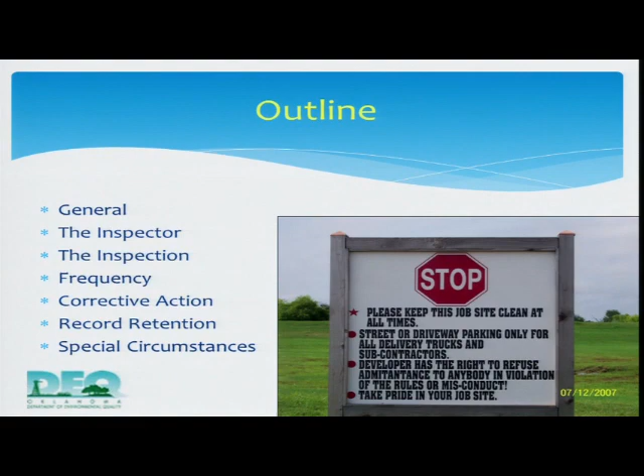All right, so this afternoon, after the heavy lunch, I hope you don't fall asleep, we're going to talk about site inspections and record keeping. All right, so what I'm going to talk about this afternoon is first just some general things. I'm going to talk about who should be doing the inspections, the inspection itself, frequency, corrective action, which we touched on in a couple of presentations, record retention, and then any special circumstances that you run into.

All right, so in general, why are we even doing this? What's the point, right? What do we care? Well, we care because we need water to survive. And if you want to look at it in a practical sense, turbid water, which is what happens to water when sediment gets into it, is harder to treat for drinking water.

When you go out to do inspections, your most important thing to realize is that you need to be safe. So that includes wearing your proper protective equipment, if you need a hard hat or steel-toed boots. Watch what's going on above your head. Watch the speed limits. Bob Gigger, up in the back, actually got to see somebody, sadly, get clipped by a car. So it's really important.

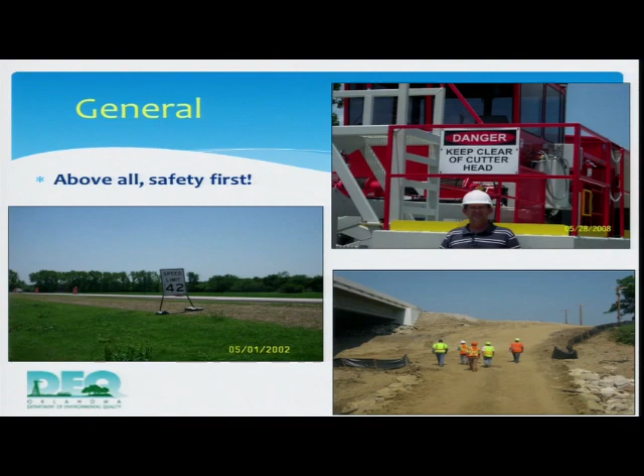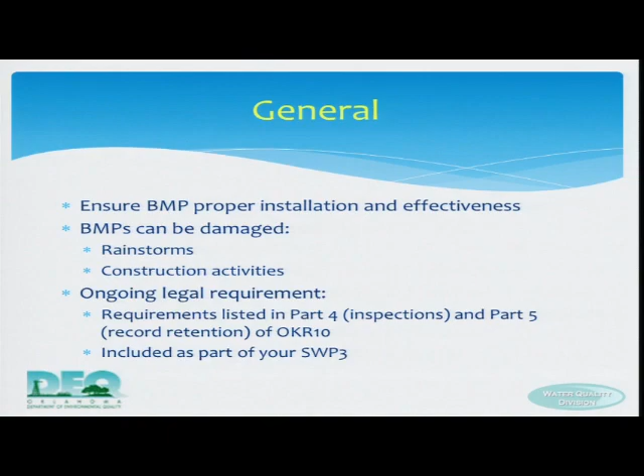Okay. So why do we do site inspections? Well, you want to make sure that your BMPs are properly installed and they're effective. You know that BMPs can be damaged by actual rainstorms or other types of weather events, snowstorms. They can also be damaged by construction activities. You know, Joe was talking about enjoying riding on the bulldozer, and we've all seen bulldozer work in riparian areas. Well, that same guy who's having a good time, if he doesn't know you're there, he can run you over. But he can also run over your BMPs. Also, and probably more important to you, it's a legal requirement in your permit.

Your SWP3 requires several pieces of information about inspections, maintenance, and corrective actions. You need to identify your inspector. You need to have your inspection schedule listed in your SWP3. You need to keep track of all your checklists or forms that you're going to be using in your inspections in your SWP3. And you need to list your specific procedures that you're going to do to take corrective action.

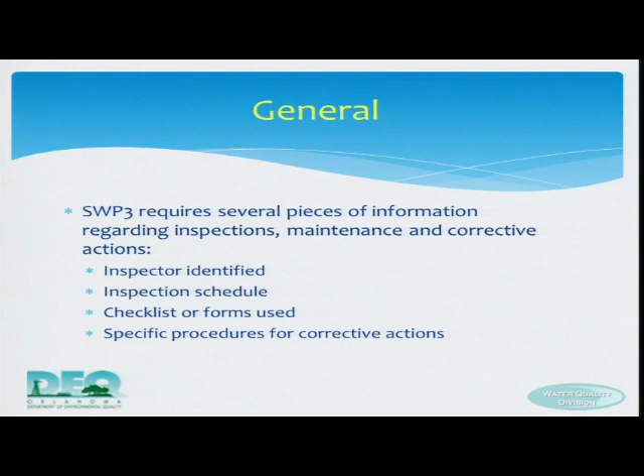So the inspector. This is an old DEQ guy, Robert Jemison. Some of you may know him. Your inspector needs to be somebody who's qualified. Now, your qualified inspector can come from your actual crew. Maybe it's you. Maybe you're the only guy. You can contract it out to somebody else who does it on a contractual basis. Whatever you use or whoever you use, they need to be qualified.

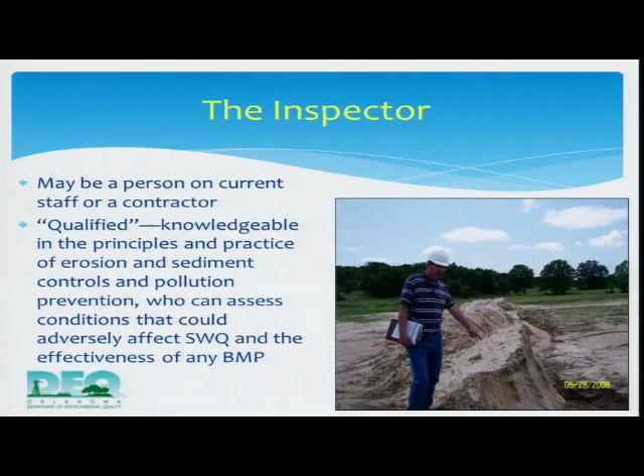And qualified, well, that implies training. So you need to make sure that whoever is performing your site inspections understands general BMP ideas and sediment and erosion control. You need to know that they know your specific site stuff, your SWP3, and it needs to be somebody who can figure out if something's not working or if it needs maintenance, and then can figure out how to fix it, all right?

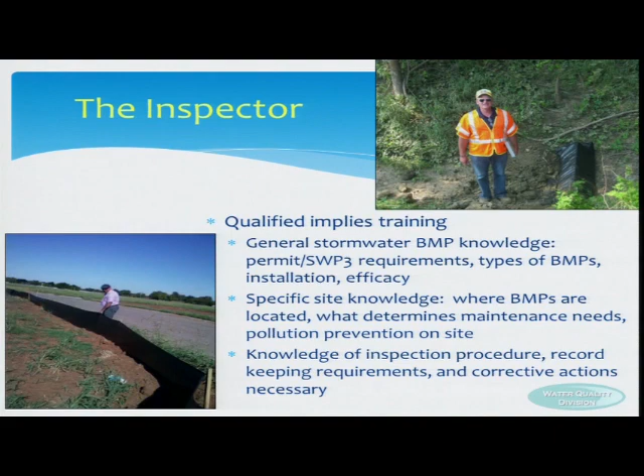At the minimum, for the inspection itself, you need to make sure that you're looking at all the cleared areas, all graded areas, excavated areas, with or without stabilization, because you are going to need to look at your stabilized areas, not on the same frequency as your unstabilized areas. You need to make sure that you're checking all of your controls, including pollution prevention. So those areas where you have stockpiled stuff, where you have fueling, where you have storage of materials, make sure you're looking at that too, and storage of maintenance areas.

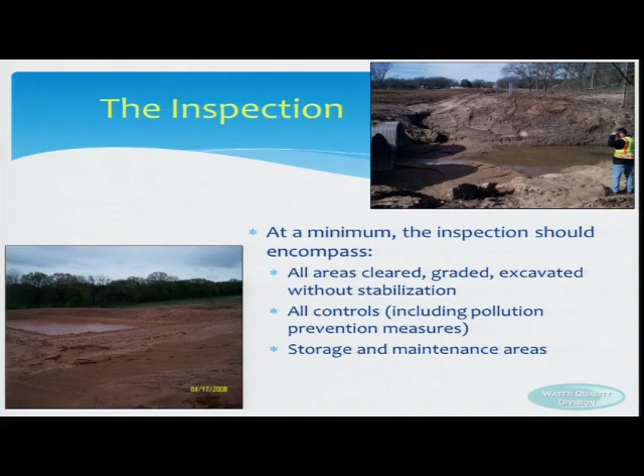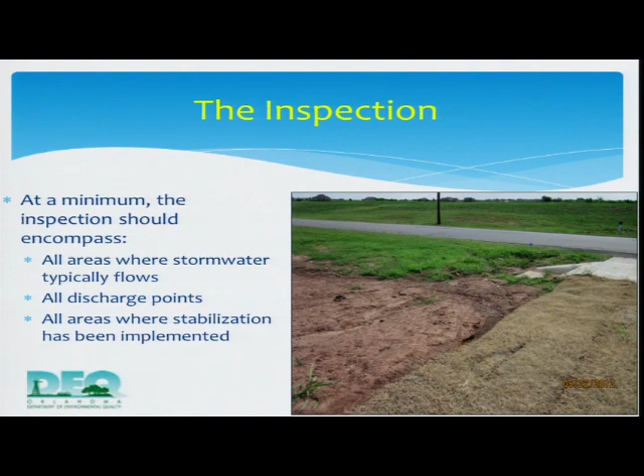All right, at a minimum, you need to look at where stormwater is going to flow on your site. It's really handy, I find, if you take your site map with you around and look at where the water's flowing, so you don't miss any areas. You want to check all discharge points. And if there's a discharge, then you're going to have some extra requirements, including visual monitoring. You need to check that where you need stabilization, it's been implemented and it's growing and working.

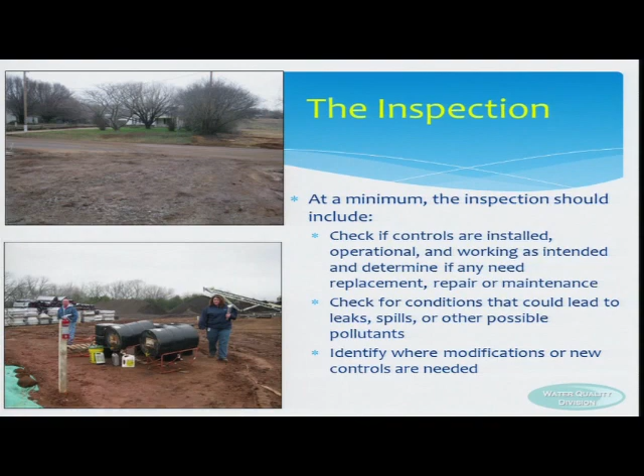Right here, we have a storage area, fueling. If you can tell right here, this is leaking. There's no berm area or anything. It's just running off. So check all these areas. At all of your discharge points, you need to check to make sure that you don't have any sediment or erosion occurring.

You need to make sure that at the banks of the creek, you're not having erosion or sedimentation occurring in your surface waters. Once it gets in the creek, and Joe loves to say this, once it gets in the creek, it's gone. So it's better to stop it before it gets there.

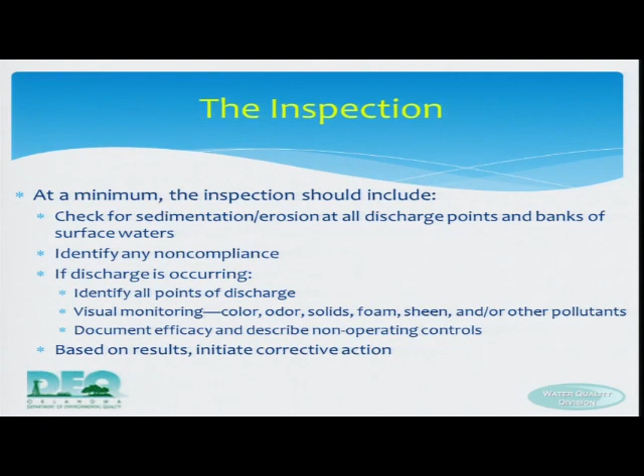You need to check on your sheet. They'll say, do you need any maintenance? Is there any non-compliance? You need to make sure that you've written that down, that you show that, yes, there's non-compliance. If the discharge is occurring, identify all points where the discharge is occurring. Visual monitoring needs to occur, and these are all visual things: color, odor, solids, foam, sheen, that kind of thing. And there's actually a form that you can use to fill that out. And then, whatever you find, that's when you do your corrective action.

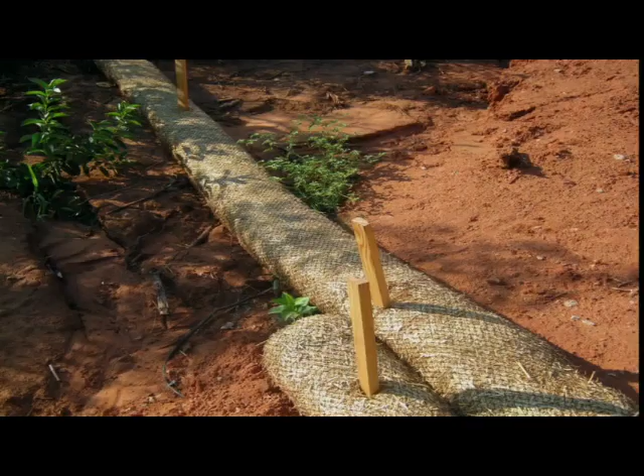This is straw wattle. Straw wattle is actually pretty effective. It needs to be trenched in though, and it needs to be maintained. As you can see right here, it's been undermined, and now water and sediment is coming right underneath it.

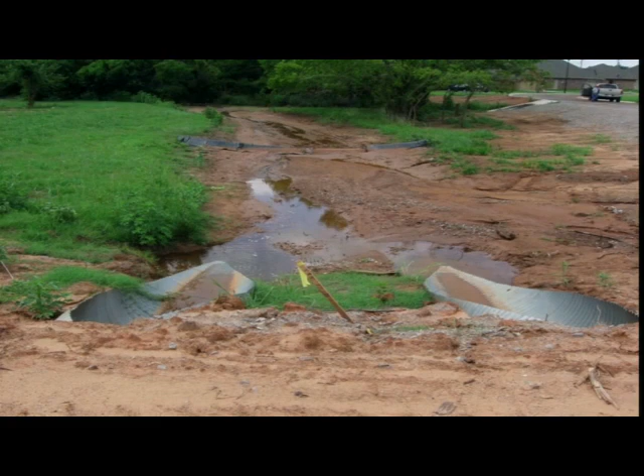This right here, back in the back, I don't know if you can make it out, there's a creek area, and here is some triangular silt dike, which is also a wonderful BMP. It did its job for a little while, but there wasn't enough. And so now all that sediment is headed down into that creek back there.

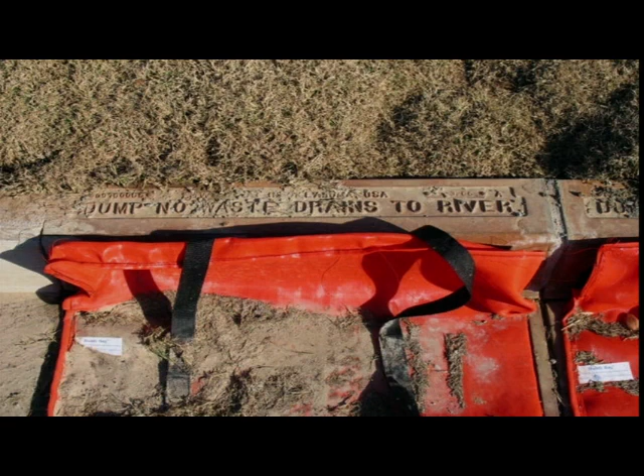Inlets, be sure you check your inlets. This is a good way to keep it from getting into your storm system. As you can see, dump no waste, it drains to the river. Here's one that's got a little sediment in the actual drain.

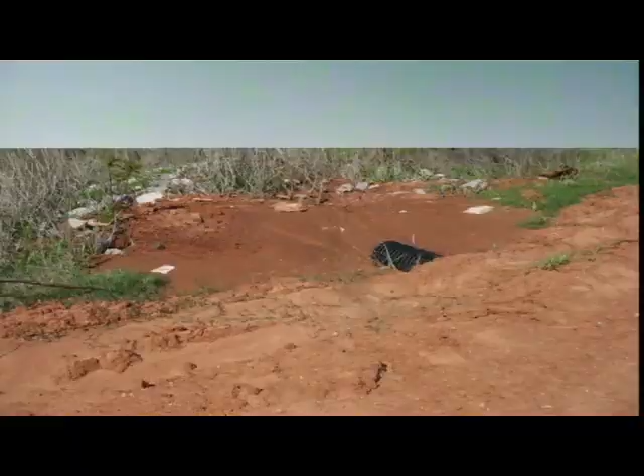Check all of your rock check dams. Joe was talking about how sometimes you see velocity dissipators being covered in sediment, and here's an example right here. They're gonna have to go in and clean that up and put that back. They could have put in some controls here to make sure that it didn't go down the side and erode into the check dam, and maybe they could have placed the outlet somewhere higher up like it's required to now.

You want to make sure that your silt fence, because everybody pretty much uses silt fence, is put in according to specifications. You want to make sure it's trenched in and compacted. When I come, when Joe goes, when Bob comes, when Carrie, any of us come out to a site, we're going to check to make sure it's trenched in. And even if it looks like it is, if I can get my fingers under it, that's a pretty good indication that it wasn't installed correctly.

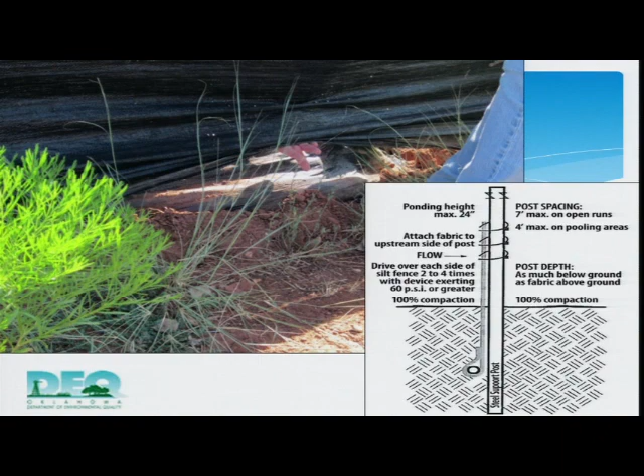Joe was talking about how silt fence can be an effective control, and it can catch quite a bit. But when it gets to 50% capacity, you have to pull it back out. So if you walked by your site and you saw this, if you were doing your inspection, then this would require maintenance. You would need some kind of corrective action.

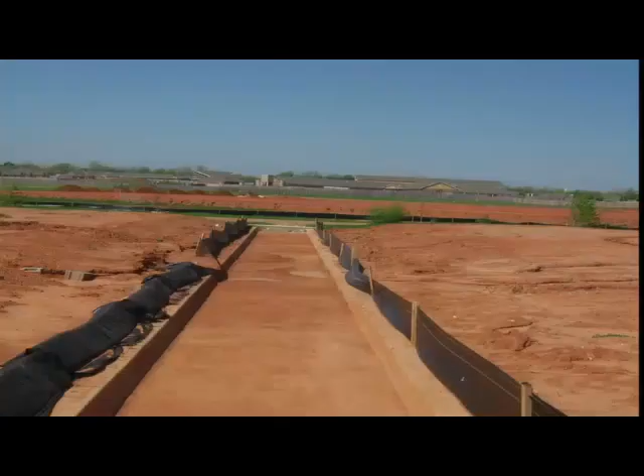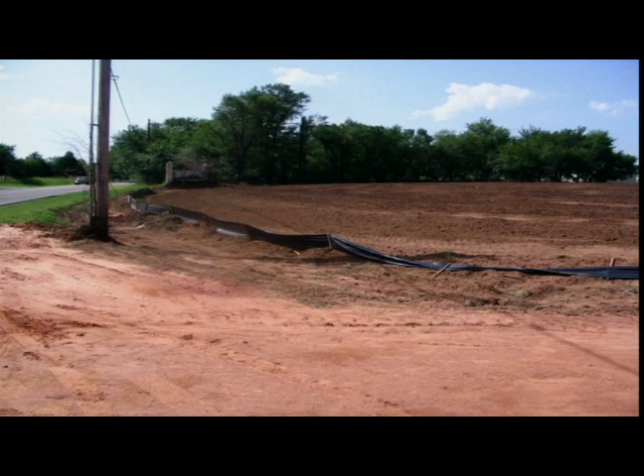Here, again, silt fence. It probably worked for a while, and then it got overcome. And this is going straight down into another velocity dissipation area here and into that creek. So this would be a great place to really focus some of your effort to make sure that sediment's not getting down into that creek. Is it installed correctly? I've said this before, but if it's laying over, then that's a good indication that it's not.

Choosing the correct placement of silt fence. As you can tell right here, this is a pretty good placement of the silt fence. The water's coming, it's hitting where it should, and there's a pretty good little buffer there. Here, maybe not so much.

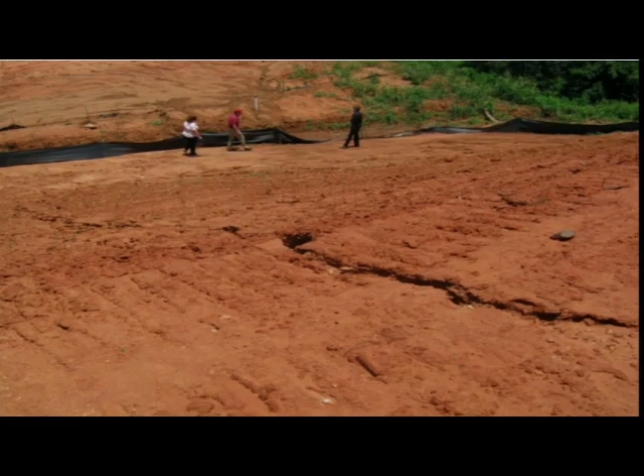Here's another application. If you're on a huge slope, is silt fence an effective BMP at the bottom of a huge slope? Anyone? No. It's not going to catch all of this sediment coming down. And you can see there's pretty good rilling right now, right here, coming down the hill. And it's already been overcome.

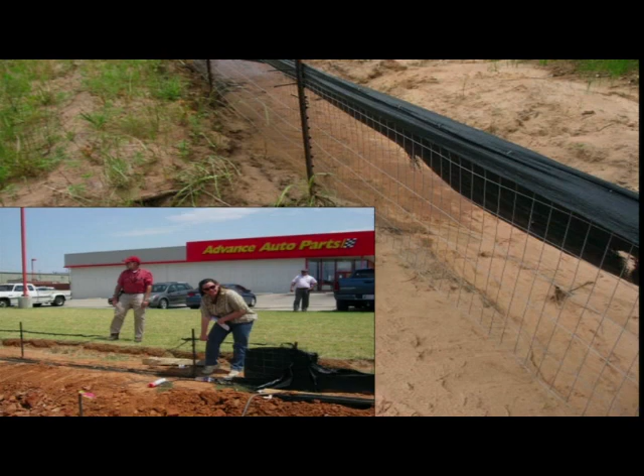Joe said that if it's installed, it needs to be maintained. If you're not going to use it, if you want to have it removed, if you mark it removed on your SWP3, it needs to be taken out. This is wire backing, and here I am. I can pull on it. It's in there pretty good, but there's no fabric to actually stop the sediment.

Now, granted, in this particular situation, on the bottom, they put the silt fence uphill, so it wasn't going to do any good anyway. So there's a lot to be said for walking your site with your SWP3, if you've had an engineer or somebody else do it, and making sure that it fits the site conditions and the size and the slope and the topography.

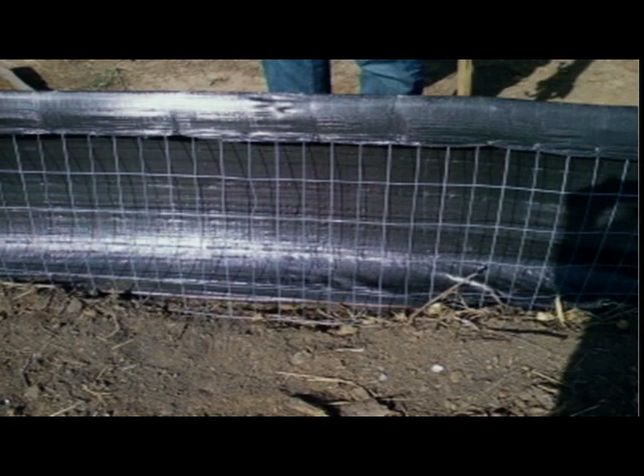Now this looks not bad, right? It's got the backing and it looks like it's been trenched in, right? A little bit closer, and there's Joe's toe, because it wasn't actually trenched in.

Okay, so we talked about looking at the other control areas, and this includes concrete washouts. This is a big thing that we see a lot on construction sites. Usually the concrete guys just want to wash out right where they're doing their work and stick it right there on the side of the ground. So what's the big harm? You know, it's just concrete wash water.

What does it matter? Concrete wash water has a pH of about 12, and so that can actually harm fish if it gets in the water. If it gets in the soil, it can make whatever contaminants are in the soil worse because of the higher pH. So that's something to realize. This one is actually built correctly. It's full, and somebody didn't actually wash out in it. But there's a sign that says where it is, and it needs some maintenance.

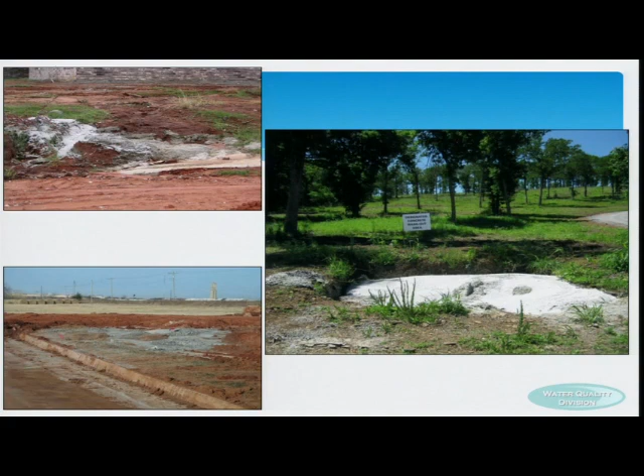So look at your SWP3 and follow whatever pollution prevention measures are in there. You're going to have something in there, whether it's cleaning up the soil or making sure that your drums are removed or berming the area or pulling them out as they're done. So just make sure you're following it.

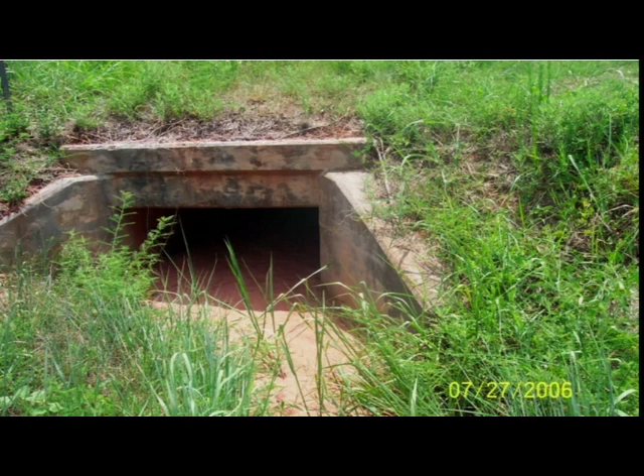Here's another area where sediment has left the site. Now, this isn't in a creek, so this might be a place where you could go and remove the sediment before your neighbor got mad and sued you. Walking downstream. If you think that maybe sediment's leaving your site, go on ahead and walk downstream and take a look, because here you can see sediment in this culvert right here.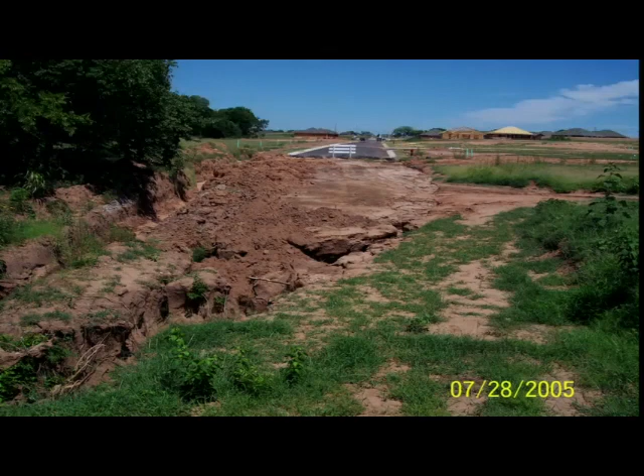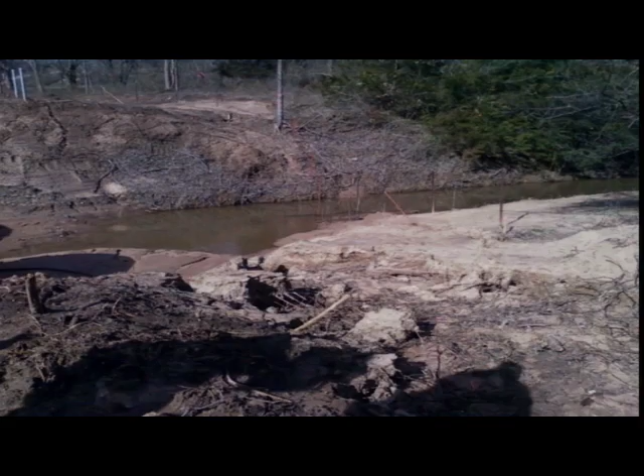And the entire area of the site. It's really easy to stop where the asphalt is and the major construction's going on, but if you come a little bit past, you can see that there's quite a bit of erosion right here. It's huge. And that erosion has gone straight to this creek. And that is just mud everywhere. Check all the banks of your surface waters. As you can tell, it's already hit the creek here, and there's more erosion here.

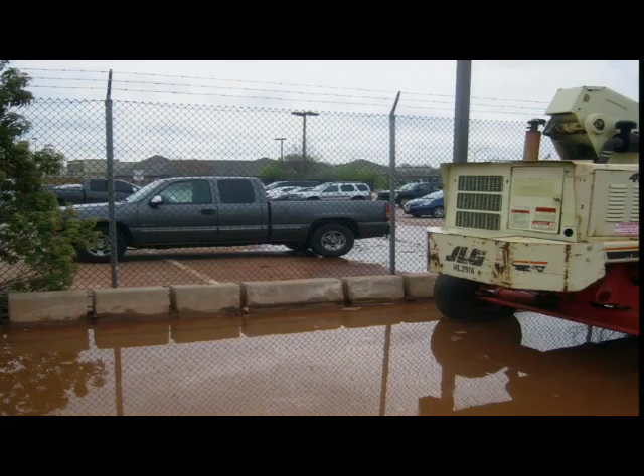All discharge points. So this is a site in the metro area where they didn't have any kind of controls along here because it was concrete. They didn't think they needed anything. But when you come over here and look, where the rainwater has gathered, it's discharging onto the post office's parking lot right here. So that's going to be a discharge you're going to need to look at and make sure you're not getting sediment or other pollutants, because what was actually in this water was oil. This particular machine right here was leaking into this water, and it was going right off site.

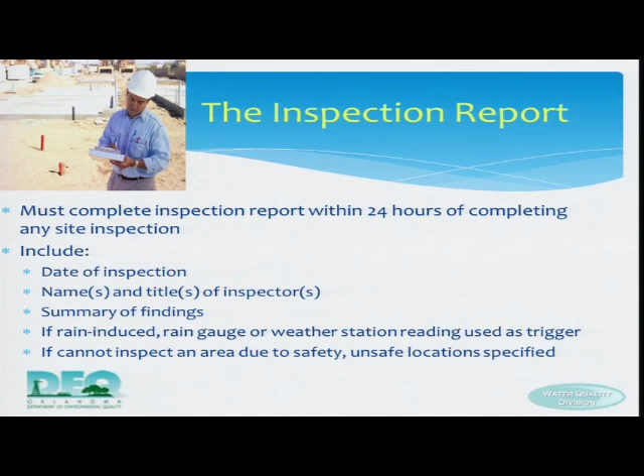All right, so you've done your site check, you've done your site inspection. Now you need to fill out your inspection report. Your inspection report needs to be completed within 24 hours of doing the site inspection. You have to have the date, the name and title, the summary of the findings. You have to have what you used to determine if it was a weather-determined event. So if you go out because it's a ½ inch of rain, did you use a rain gauge? What was the reading? Did you use a weather station? And what was the reading? And if you can't go to an area because it's dangerous, like Joe said, then you need to document that too.

Every inspection, just like every piece of paper that you keep in your SWP3, has to be signed by the duly authorized representative. Again, you're certifying that you're not making stuff up, so make sure that's in there. In your SWP3, you want to keep copies of all your inspections so that when we come out, you can pull them out and we can look at them and make sure you're doing them correctly. Or make sure you're not signing a bunch of blank copies and just appending them to the back.

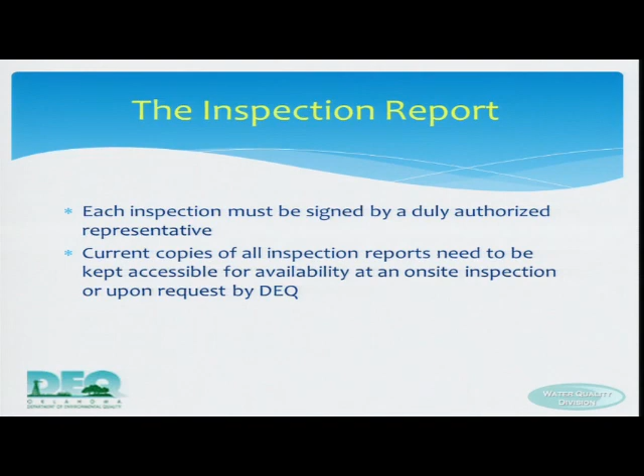This right here, this is an example of just a site checklist. This is at the military housing privatized portion of Fort Sill down in Lawton. They contract with a guy who comes out and does just a little site check, and then he goes back and fills out an inspection form, and they work together to clean it up.

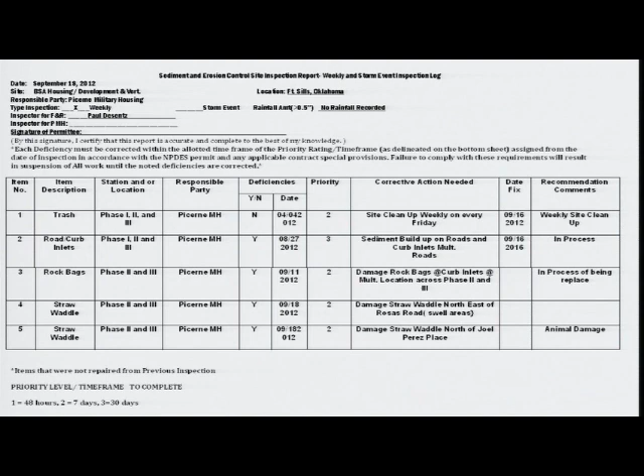So the frequency. How often do you have to inspect? Well, at a minimum, according to the permit, you have to inspect once every 14 days and within 24 hours of a ½ inch of rainfall, and if you have a discharge from snowmelt. A lot of people don't think about that particular thing because it only comes during the winter. But if we do have snowmelt and it's caused a discharge, then you do need to inspect within 24 hours.

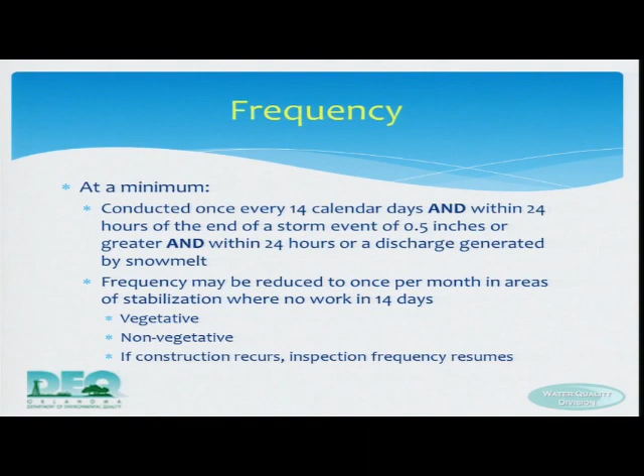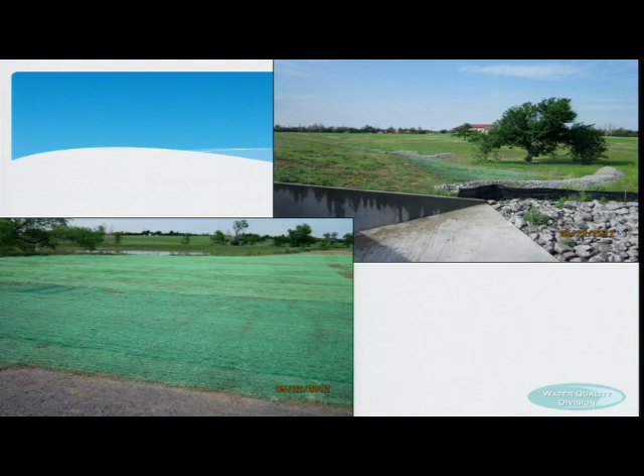And these are examples of stabilization, no construction's going on for at least 14 days. This is also at the privatized military housing at Fort Sill.

All right, so you've done your inspection, you found out that your construction entrance needs refreshment, or you found out that your contractor didn't put in your silt fence correctly, or you found out that nothing's been put up. When that happens, then you need to do a corrective action, and it's required within 7 days of finding this out. And this also includes the special cases of the asphalt batch plants. So if there's a monitoring exceedance, there has to be a corrective action.

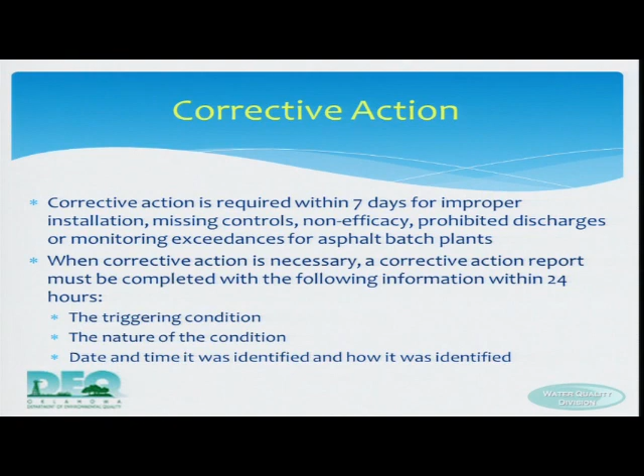When the corrective action is necessary, then you also have to create a corrective action report, and that has to be created within 24 hours. You have to put on this report the triggering condition, the nature of the condition, and the date and time it was identified, as well as how it was identified.

If you can't do your corrective action within 7 days, there is some leeway, that's fine, but you do have to come up with another date, and then you have to describe why you can't meet that 7 days. You know, we can't get gravel shipped in within 7 days, whatever it is. And again, certification statements. Everything that goes in the SWIP, everything that goes with the permit has to be signed and certified by a duly authorized representative.

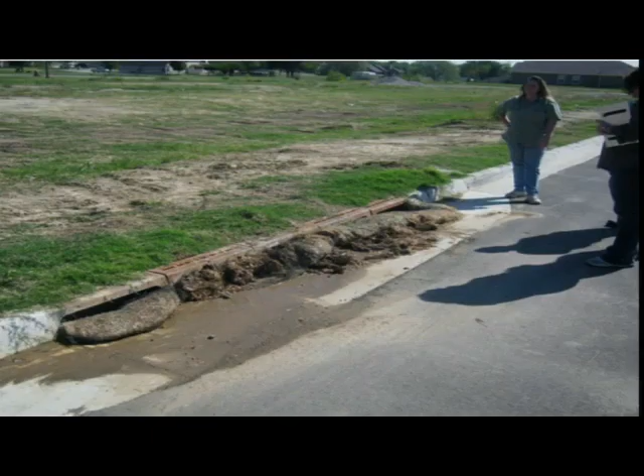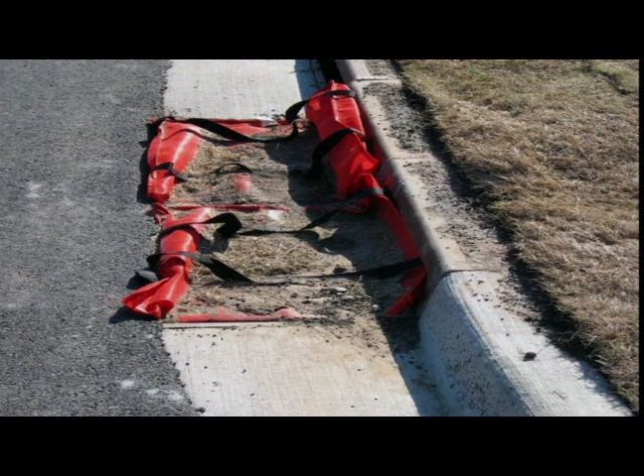Don't forget to look at all your inlets. This one's pretty easy to correct because you can just lift it up and clean it off. The other one, you have to pull out all that hay and reinstall. Now in this case, maybe what you need to do, since you're getting it in the street, and that's quite a bit of sediment there, maybe what you need to institute is a different kind of street cleaning program. Maybe you're doing it as needed. Maybe you need to start changing it and doing it once a week. Or maybe you need to get people with shovels out there every so often to make sure that this is not occurring.

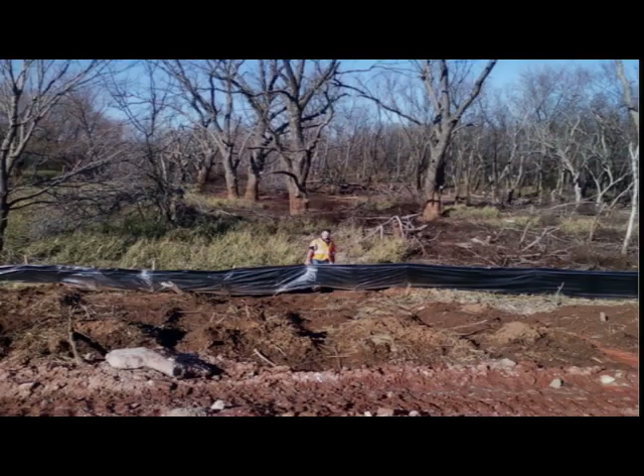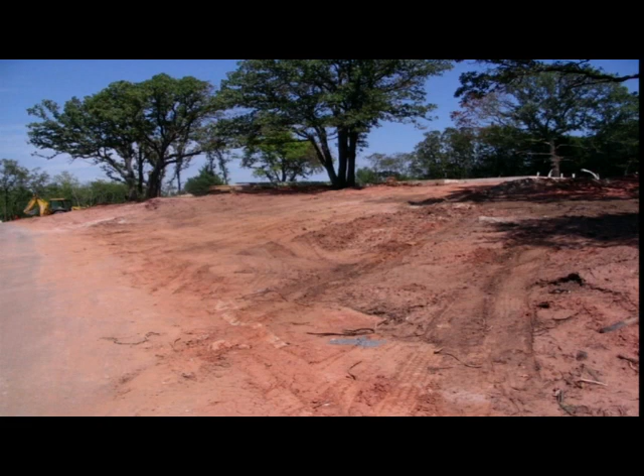You find that your silt fence isn't installed correctly. Well, A, you probably paid that contractor to install that silt fence. So I would call him up and say, hey, why didn't you install this correctly? Come fix it right now. Don't forget to document it in your corrective action report. This is another instance where you need corrective action because nothing's been installed. This is the road and this is the graded area. It's kind of hard to change.

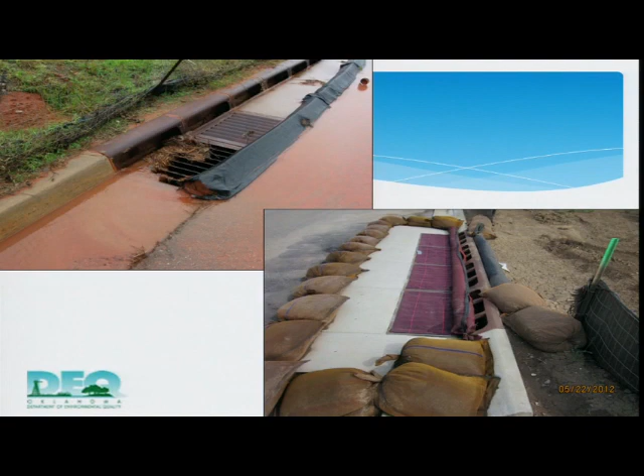Within 7 days of the trigger event, a record of the following has to be completed. Any follow-up actions that you've taken when you're reviewing the design, the installation, or maintenance controls, and you've got to keep all the dates with it. The summary of any modifications that you're making or that will be made, with the dates that they either have been made or will be made. And then finally, a notice of whether you have to update your SWIP, okay? When you're updating your SWIP, don't forget your site map. It's really important.

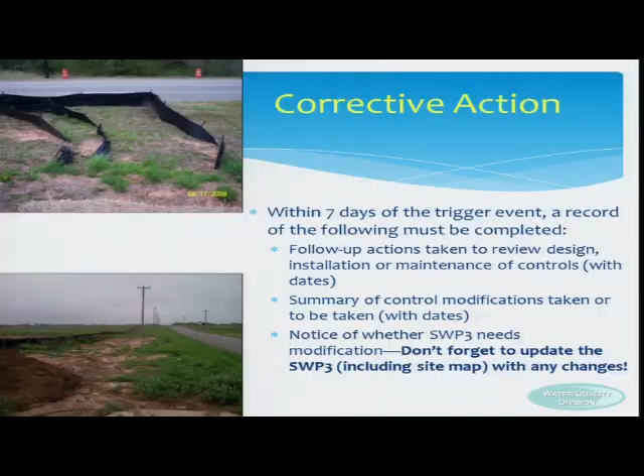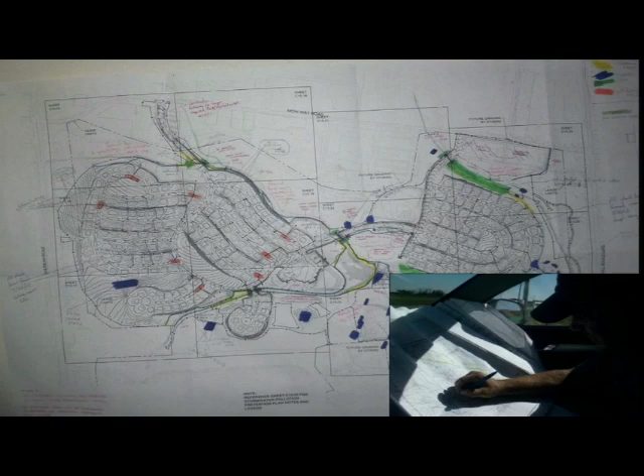These are two examples of site maps. This is from Concern, color-coded, dated, initialed. Now, they keep this on a wall. They have one that they use to walk around and make notes on, and this is on the wall so that they can keep track of everything all together. And this is in Elgin. He's filling out his site map right at the site, and that's fine too.

Record retention. You have to keep all of your records from the start date of construction to the date that you have final stabilization. And then you need to keep all of those records somewhere in your corporate office for 3 years, according to EPA. You need to keep a copy of the SWP3 at the construction site or at a place that's locally accessible. So locally accessible, like Joe was saying, means within a reasonable amount of time, you can get it to the site. As you know, you have to keep an actual sign at your site that has all of the information.

Well, on this sign, not just that, you have to put where the SWP3 is located, okay, and how we can get a hold of it, how we can see it. If you want, some people do this. They leave a little box out there at the site, if you're not going to be there all the time, with the SWP3 in it.

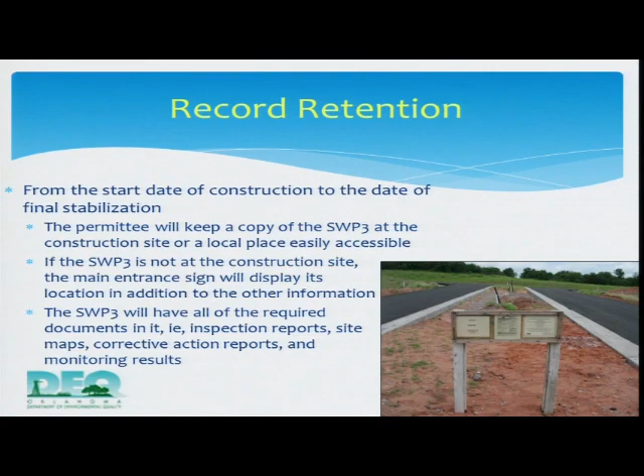That's acceptable too. You need to have all of the required documents in the SWP3, the site reports, the maps, corrective action reports, any monitoring results. Keep it in a binder. We usually like a binder because it's easy. You can pull it off the shelf and hand it and look at it. It's easy to keep track of.

Special circumstances. We talked a little bit about impaired waters and ORWs and ARCs. The big difference with site inspections for those particular areas is that the frequency has increased from once every 14 days to once every 7 days, but you still have the requirements of within 24 hours of the half-inch rain or within 24 hours of the discharge from snow melt.

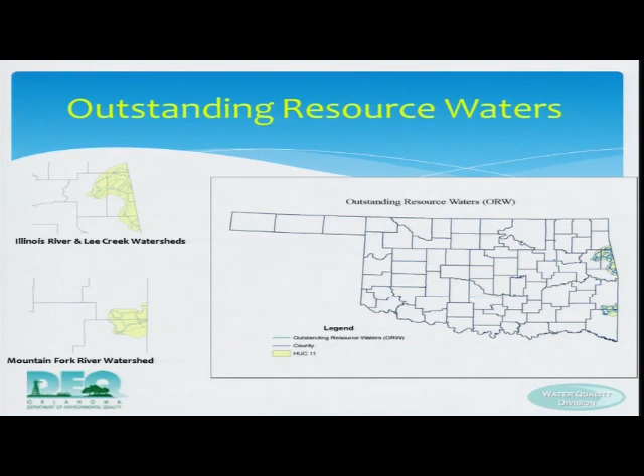This is a map of where the outstanding resource waters are. And here's a little bit closer view. I think most people are at least familiar with the Illinois River area. And this is, again, a direct copy from the ARC viewer, which I think we're going to get to see, right? The GIS with the Aquatic Resources of Concern.

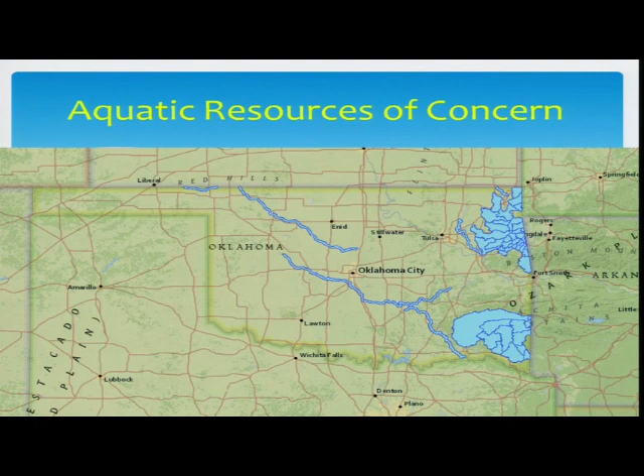And as Carrie mentioned, you know, the Red River's gone, and there's a couple of other areas that are missing from it, which is a good thing, because that means water quality's gotten better. And so they're off the 303 list, and there aren't species that we have to worry about. I hope it's not because they're dead. But they're not. We don't have to worry about it.

All right, so my final set of special circumstances are concrete and asphalt batch plants. We've talked a little bit about this already, but at these two particular kinds of situations that might occur at a construction site that are included in your OKR10, the comprehensive inspections of the site have to occur once per year, which is the ACSCER. You include it with the ACSCER by a qualified inspector. The scope of inspection, the name of the inspector, the date, and the observations.

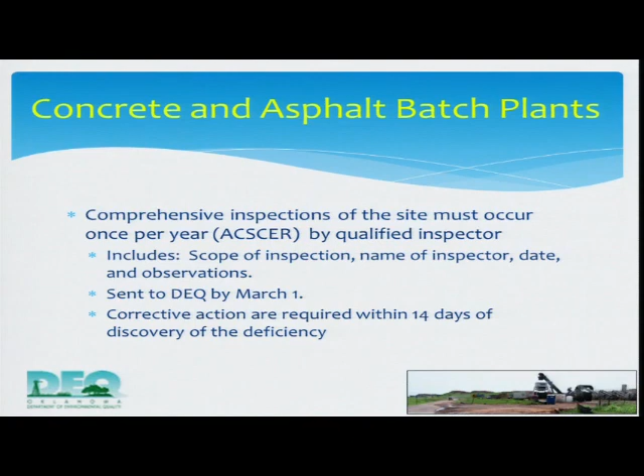Again, sent to DEQ by March 1st, and corrective actions are required within 14 days of discovery. And this is just a picture of one. Quarterly visual monitoring is also required. So if you have discharge, you need to examine all the discharges at each outfall unless they're similar, and if you are going to say that they're similar outfalls, then you need to explain

how they're similar. It needs to occur during daylight, normal working hours, within the first 30 minutes of the start of discharge, greater than 0.1 inches, and 72 hours after the last event. Now, if your rain's going on at night, you don't have to worry about it. It's when you're at work. And then you're also going to keep this in your SWP3, okay?

And this is the back of a concrete batch plant. Now, this wasn't covered under OKR10. This was under a general permit, a mobile batch plant. But it's really important when you're doing your inspections that you check the entire area.

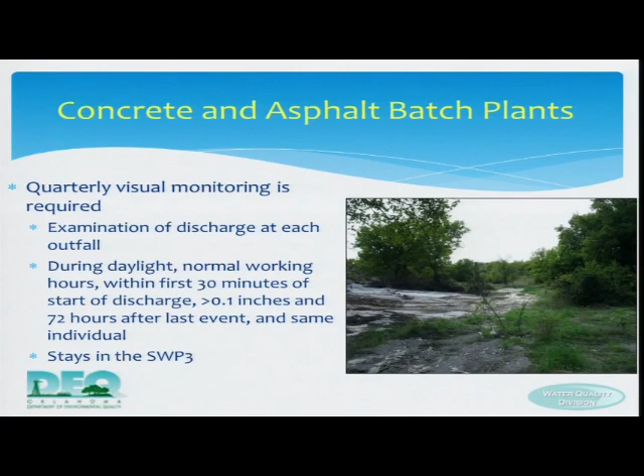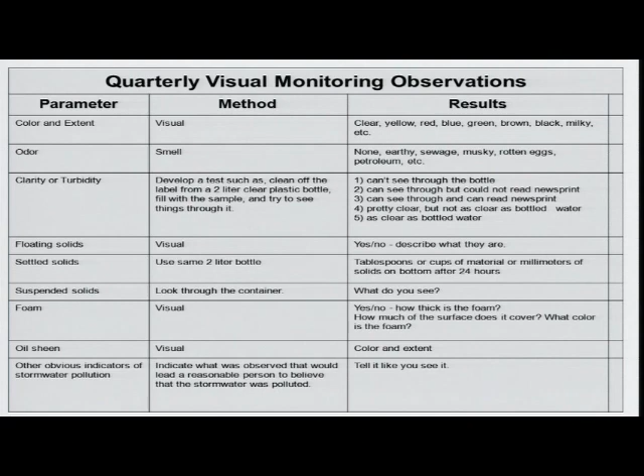And this is an example of what the quarterly monitoring observation might look like. Your color and extent, you're going to be looking at it. Is it clear, yellow, red, etc.? Do you have an odor? Is it clear or turbid? Do you have solids, etc.?

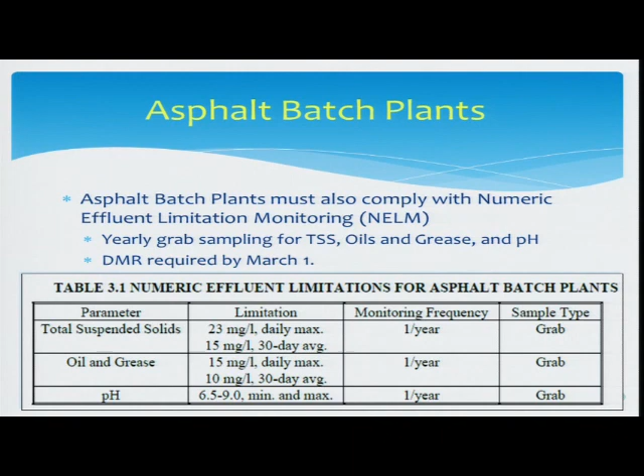Asphalt batch plants, like Carrie mentioned, are a little bit different. They actually have numeric effluent limitations. Those are for total suspended solids, oil and grease, and pH. It's a yearly grab sample, and you have to send the DMR by March 1st. Again, keep it with your SWPPP. Everything stays with your SWPPP. And that's it. Do you have any questions?

Yes, Jeremy in the back. Just a minute, Jeremy. Wait. All the way in the back, Mickey. Jeremy, can I have a copy of your inspection report?

On the grab samples for the discharge on the monitoring, if you have a site that's going to run off to a large detention or retention structure and it does not ever actually discharge out of your site, do you have to take a sample for the visual monitoring? Is that discharge when it leaves your site? It's discharged when it leaves the site. So if you don't ever have a discharge, there's no monitoring for that? Then there's no, yeah. Exactly. Okay, thank you.

Oh, yeah, good point. You do need to keep a discharge monitoring report that says no discharge. So those discharge monitoring reports are required monthly. So if you don't have a discharge, then mark no discharge, okay?